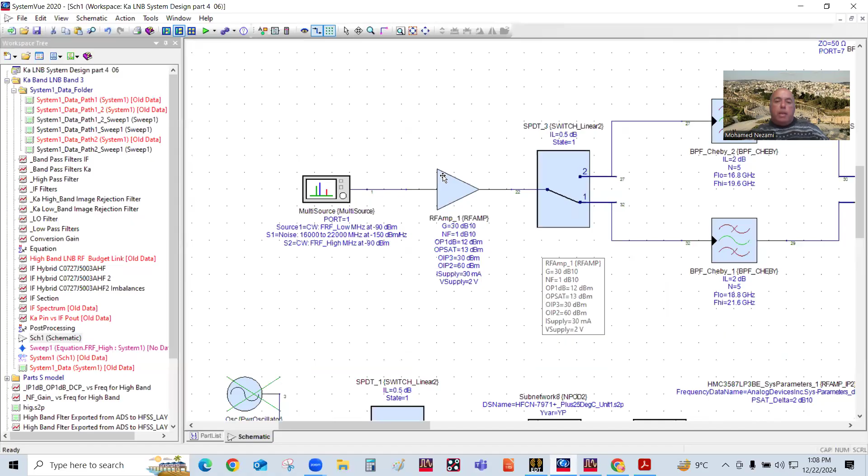If we can go back to here, we can go back to System View. This was designed with the LNA specified with these top level specifications, namely 30 dB gain, noise figure of sub 1 dB, and then you got the saturation level is 13 dBm.

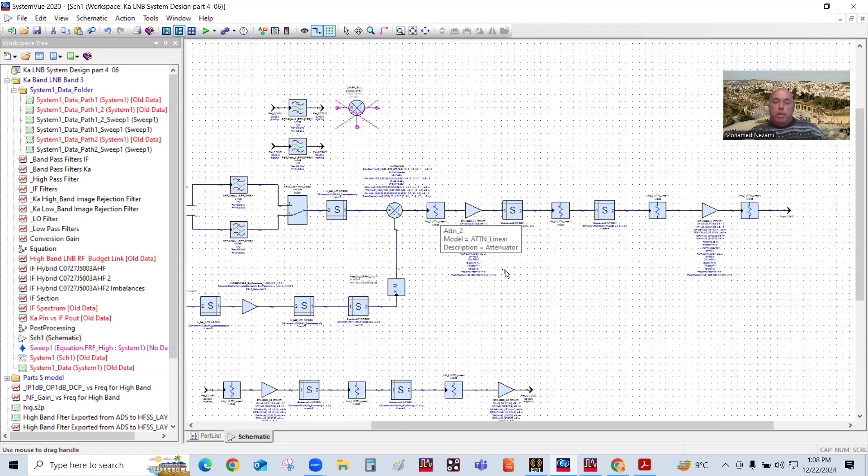Okay, so the LNB itself is a dual band. So we've got dual image rejection filter. We come in here, we switch between them, and two dual LOs. And then of course we have a common IF stage in here for both, and that's why we switch between two LNBs.

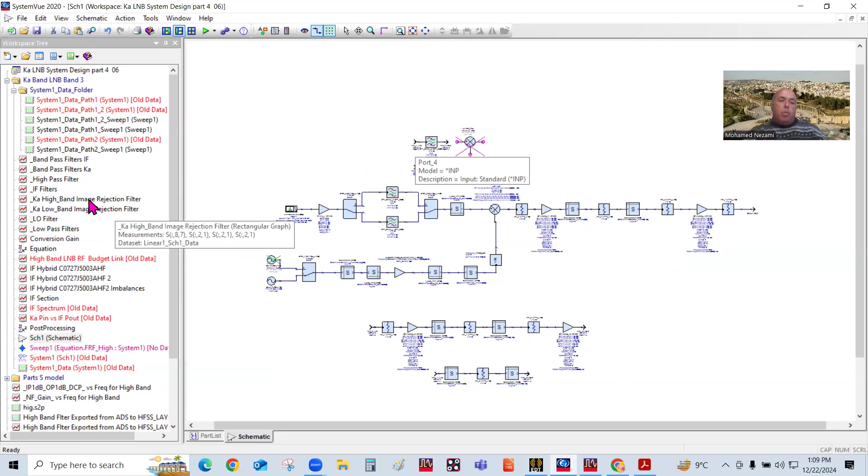Is because we want to maintain the same IF to shift back the IF into the same band. I have designed this, refer back to part one and two. That's where we analyze this, and you can go back and check all this stuff. So this was designed back then, and if you look at the budget link analysis in here.

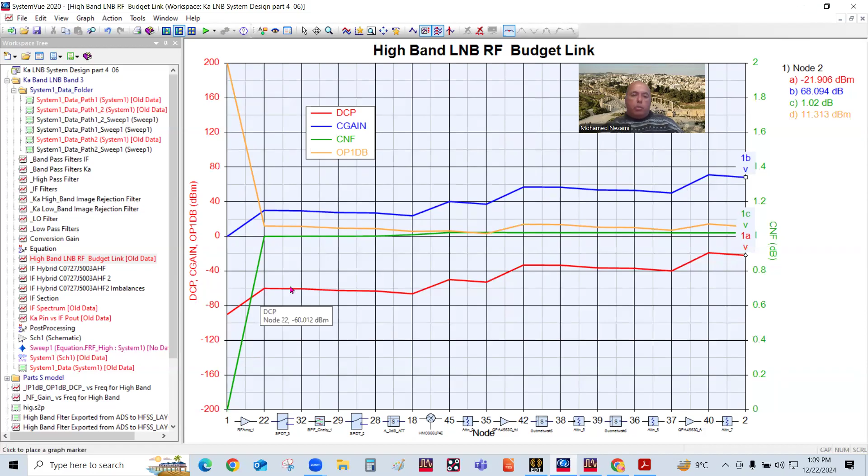So we've got these, let's see, this is the desired channel power, the cumulative gain, the cumulative noise figure, the output P1 dB compression point throughout the whole chain. And this right now is programmed for the high band, okay? And this is what we've got.

So we verified all the system level, and I have designed the filters last time, of course. Now recall that this is the frequency plan that we had. Basically, we had two bands from 17.2 to 21.2, and we chopped them into two bands, two LOs and two IFs, I mean common IF, sorry, for both of them.

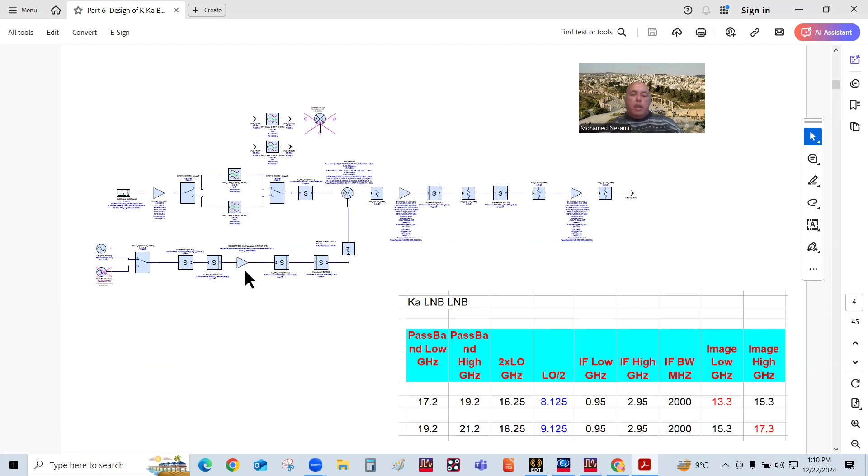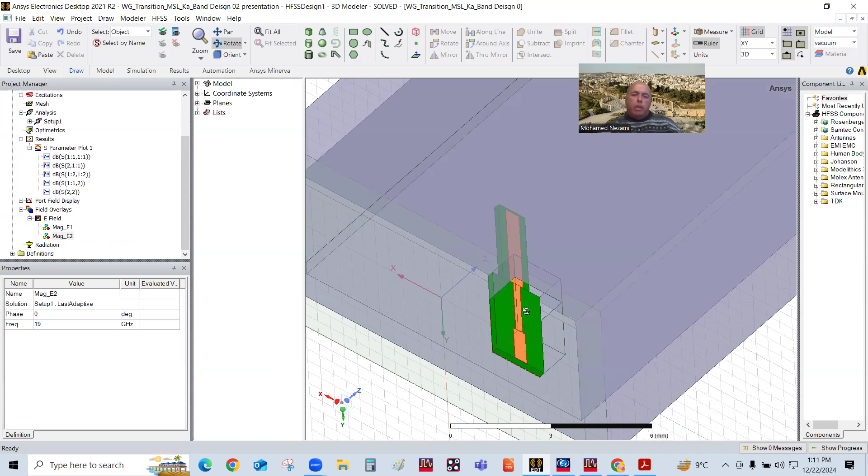And this is the design for the waveguide to PCB transition. As you can see, there's a probe that is going inside here. You can see that the substrate goes in, but it doesn't have a ground plane. And then I have a little section of a quarter wavelength in here that will match the impedance of this probe to a 50 ohm line on a substrate. That's Rogers 4003, 8 mils height.

Okay, so what we're going to do today, we're continuing this process. So this is what we still got to do: the low noise amplifier, finish that design, and finish the microstrip to waveguide.

All right, so LNA design, here we go. Top specifications, like I said from last time, this is what we use in the block diagram. So this is what we're going to do.

So we need 3 stages of this amplifier to be designed. We worked last time, and I got the small signal model in here, the S parameters CE3520K3. This is the device, and then I designed the system based on this.

I'm still waiting to get access to the nonlinear model, which will enable me to generate S parameters at various bias points other than the single bias point which NEC or CEL have given out here. That way I can predict what the saturation level and what the 1 dB compression point and third order intercept.

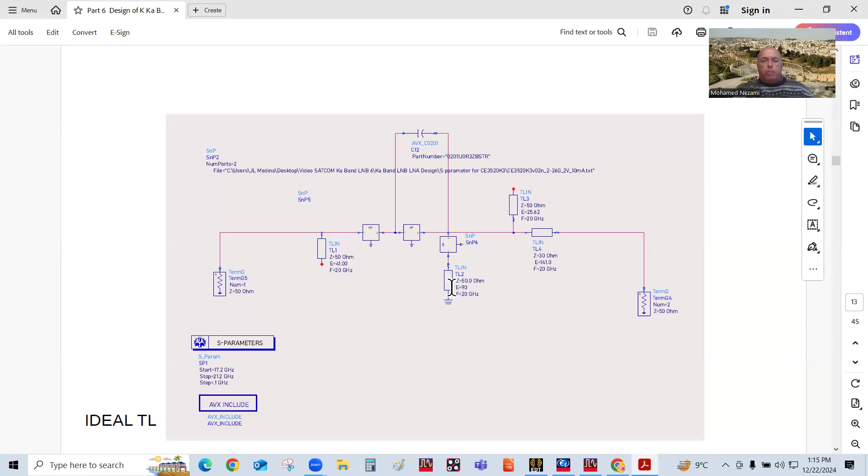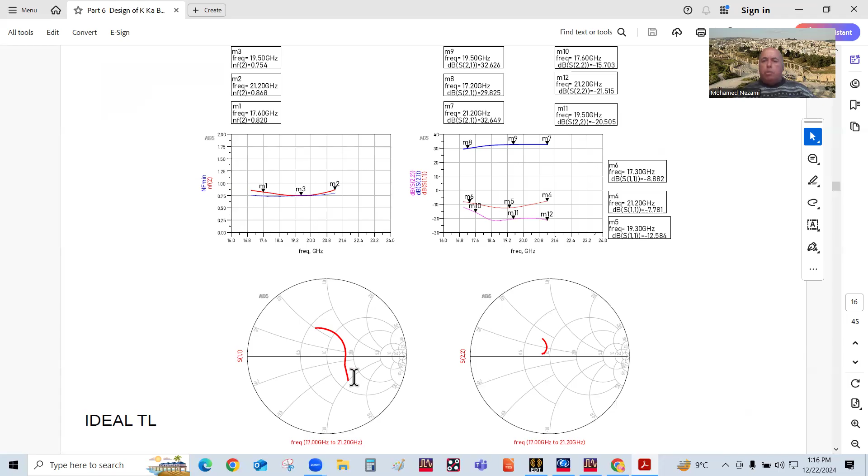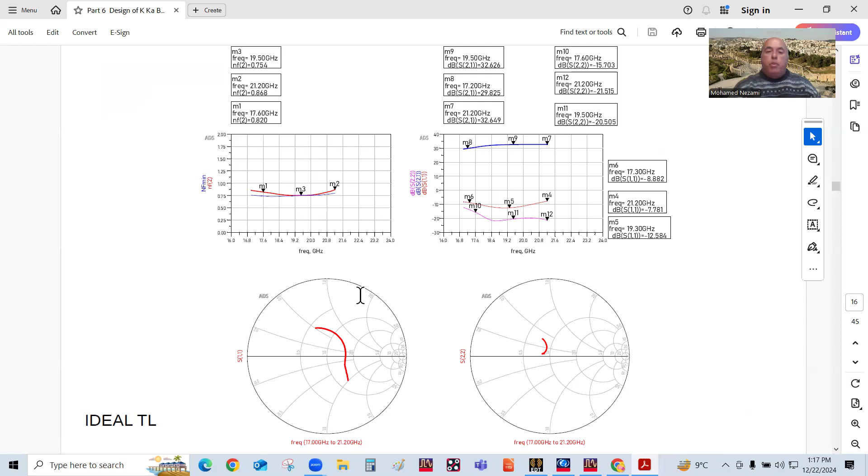And this is really normal, that's what you usually do. If you have a low noise amplifier, you can really never see a low noise amplifier that has return loss better than, I would say, sometimes 7 dB, 6 dB. That's because we really need to have a low noise figure, and as I showed last time, the optimal point on the Smith chart for gamma opt is a way further away, not the same location as the gamma of the device itself. So we need to match for not maximum power or maximum gain, but for noise figure.

And you can check back, please check back to the other one. Okay, so what we're going to do is take this circuit in here and then substitute transmission lines to these. So what we're going to do is, I go back to my ADS.

So we started out with this here. This is the transistor, and these are resistors, even though they're not plotted as resistors, but right now it's a two-port network. This resistor is from, whose resistor is this? Let's see.

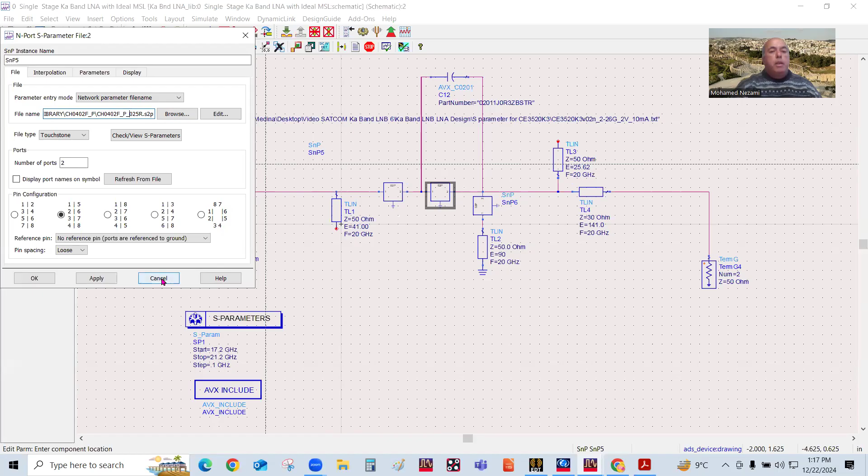That's a CH series resistor—I'll check it back in a minute—but this is a thin film resistor that is appropriate for Ka bands, okay?

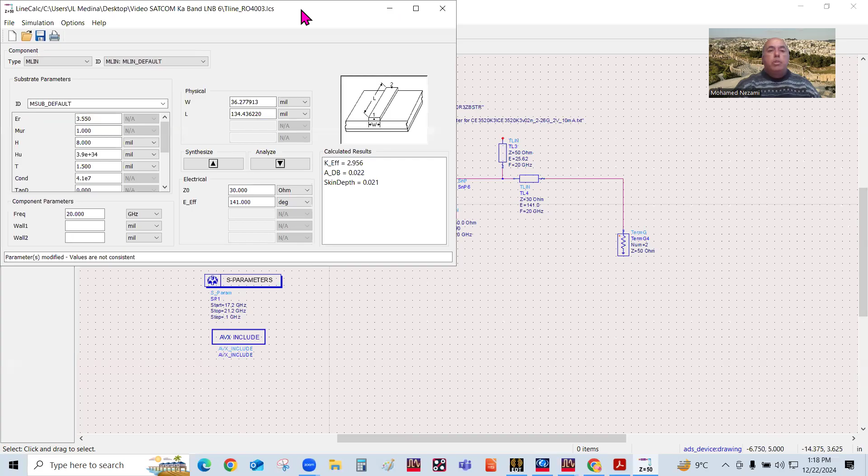So what we want to do is replace these lines with real transmission lines. The way we do that is we go to the tools and get the LineCalc, and then we just basically program it so we can do this. For instance, this line is 30 ohm, so we've got 30 ohm—it's already programmed for this. Then 141 degrees, and then we synthesize that.

So the substrate is RO 4003, 8 mil height. And when we run this, of course, it will solve and give you exactly the width of this line, which should be 36, and the length is 134. And you keep going through all of these.

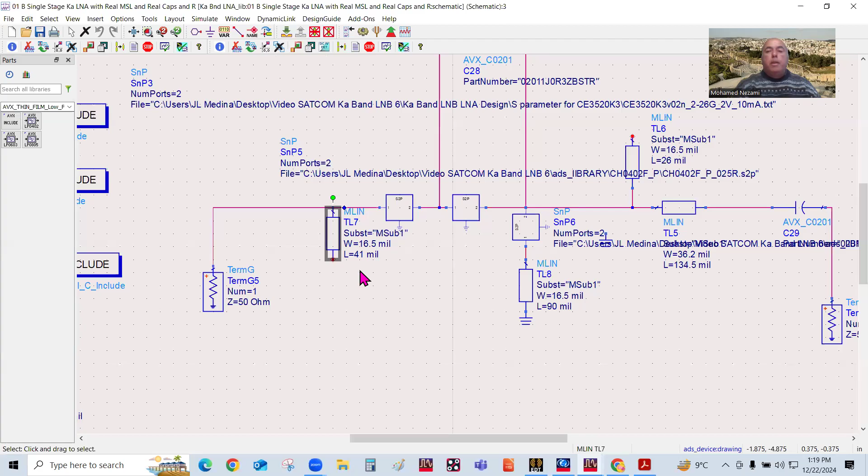So what we're going to do is close this and go to the actual layout. So this one—this is it here. If you open this, it's basically right here. You can see these lines have been replaced by microstrip lines, specified with a certain width and a certain length, and the substrate, which is M sub 1, specified in here.

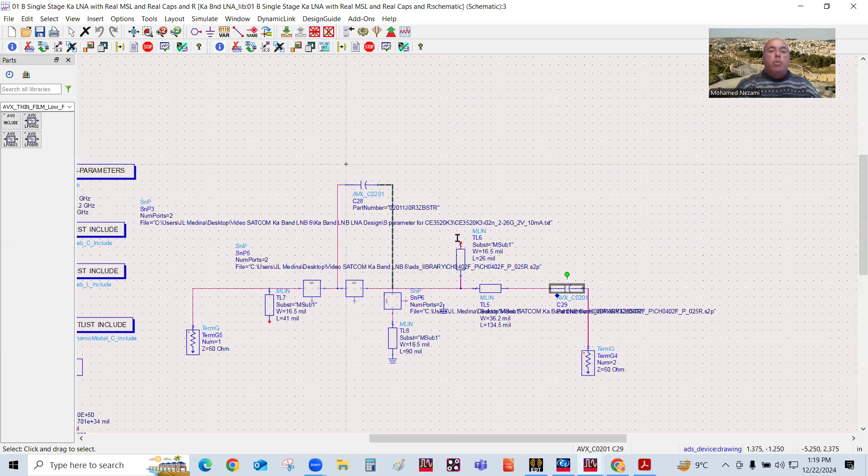So we do this for all of them. The cap components I already selected—this is AVX cap, high Q caps, and this is AVX cap. The resistors I've selected before, okay, and the quarter wave line in here was selected as well. So now what we do is run this, and we hope it will not deviate a whole lot from the actual ideal lines, okay?

All right, let me check what's going on here. Okay, so let's see it now. So we've got, like I said...

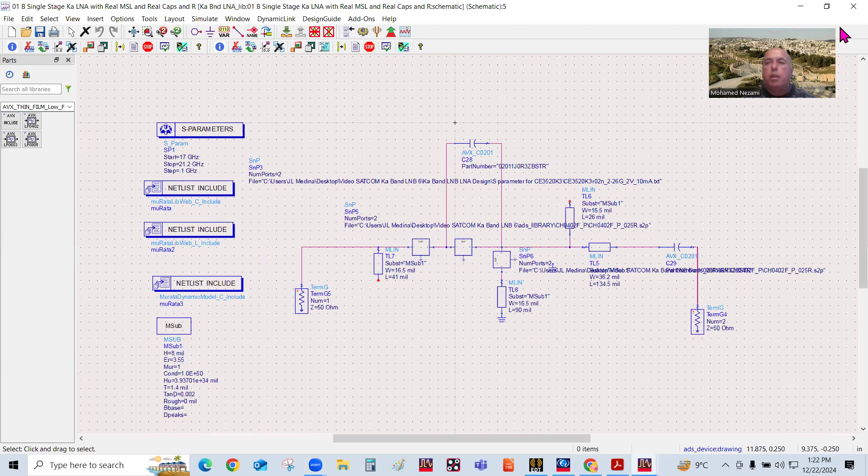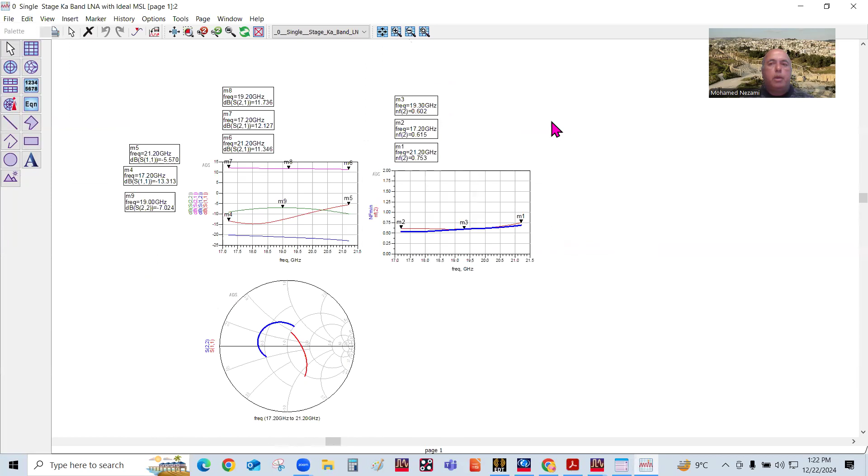We're at this—no, this is three stages. Let's see, this one in here is the LNA that we have designed, single stage, and we said that the response of this is really acceptable and nice and everything. So we're going to take this now and replace all of these lines with actual lines.

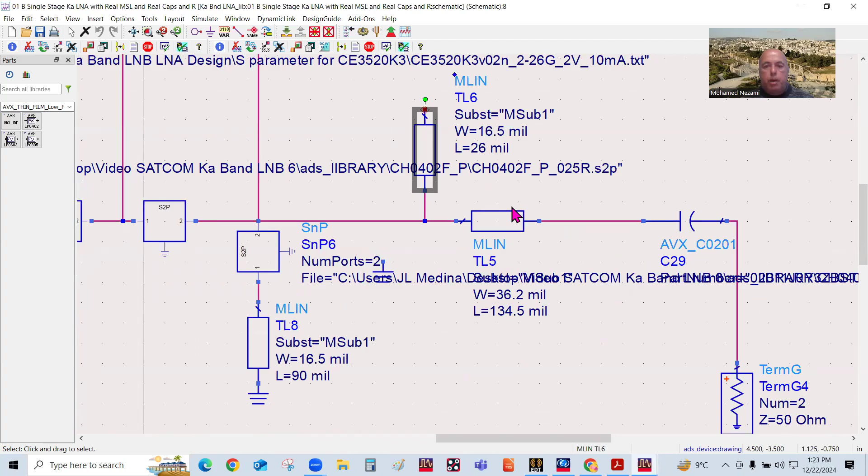And we have this cap already chosen from AVX. We also need to put a bypass cap, a DC decoupling cap, on the output. So let's see—now all the lines have been replaced by their equivalent from ideal to real lines, and the capacitors have added this cap in here. So now if we run this, ta-da, this is exactly what we got.

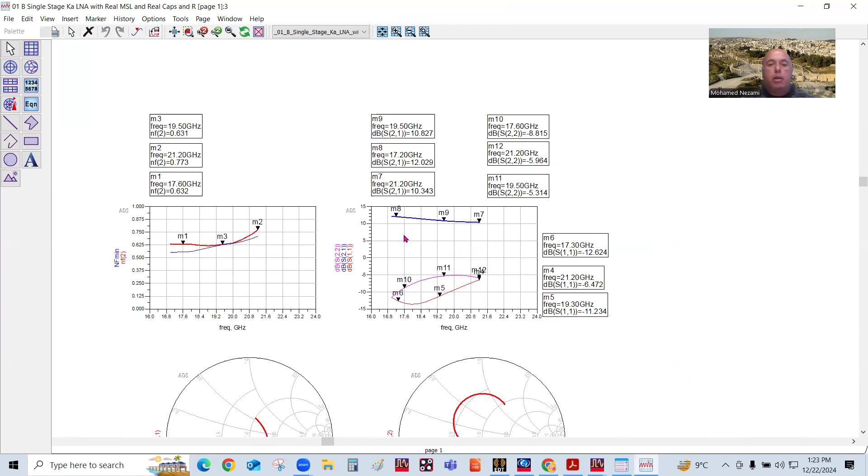So we're still good—we've got the noise figure at 0.6, 0.7. That's what we got, okay? And that was with the actual substrate lines, and the gain is anywhere between 10 to 12. So we got about 2 dB.

So what we're going to do next is use 3 stages of this and see what we get. So let's see, we're going to get 3 stages in here. What I did is take the same section and copy it 3 times, okay? And let's run this and see what we get—hopefully that's not going to be very far from the actual one with ideal lines.

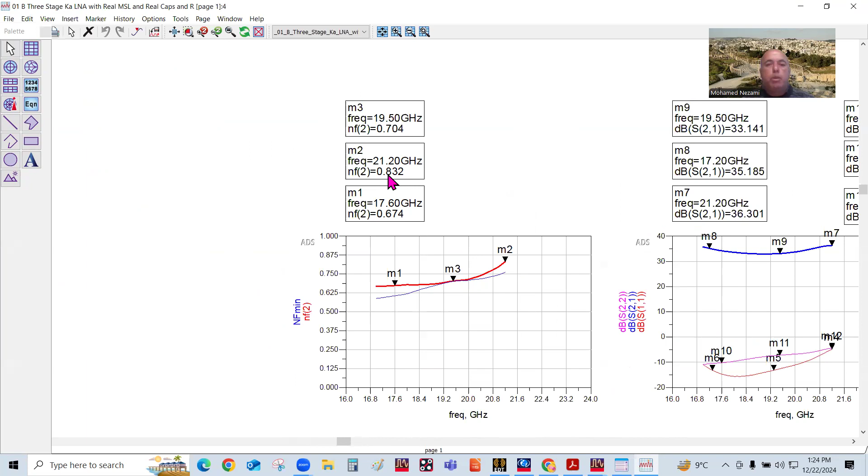And that's what we got. So the noise figure is still at most now increased by 1/10 of a dB, so 0.8 in here, okay. And the gain is 36, 35, 33 in here, so we have a slope that is sagging in here.

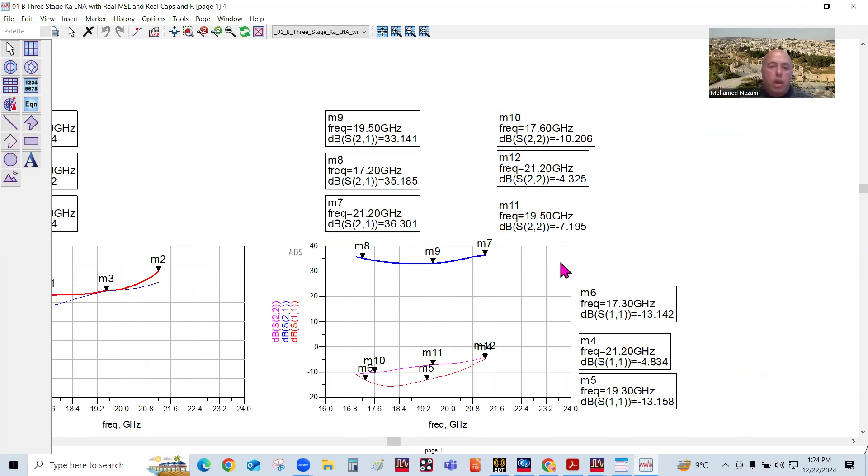And remember, this is still—I don't have any optimization on this, I have not run any optimizers. This is straightforward from last time. So what do we need next? Well, what we need next is—let's go back here. So we did this with actual lines, real lines, 3 stages with real transmission lines, and that's what we got. We ran that, and now we need to do biasing.

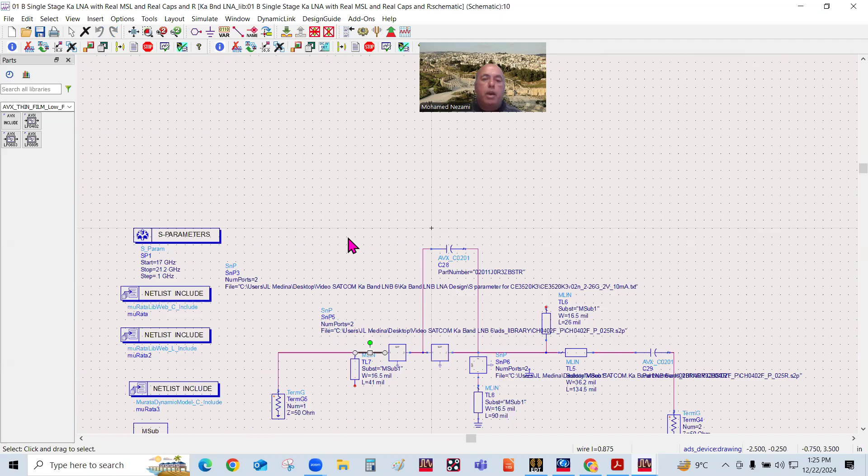We need to add the DC bias, because this topology in here is still missing the drain bias, which we have to add right here, and then the gate bias, which we have here. And like I mentioned in part 5, I can't afford having DC decoupling on the input.

The input to the waveguide is actually going to be a probe, an open circuit probe, which will have DC on it, so that I don't have to introduce components that would enhance or introduce more thermal noise than I would want, preserving the input here.

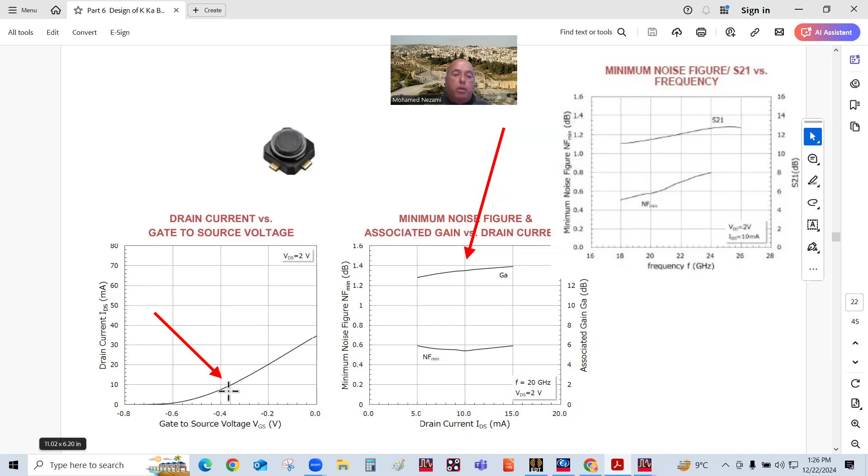We're going to add a drain bias and a gate bias. If you recall from last time, for the device we chose, the 3520 NEC, the bias point we want to run it at is 10 milliamps, the bottom of the ball right here. To get 10 milliamps, if you look at IDS versus drain source voltage and gate to source voltage, which is negative, you would need to introduce at the gate about -0.43 volts.

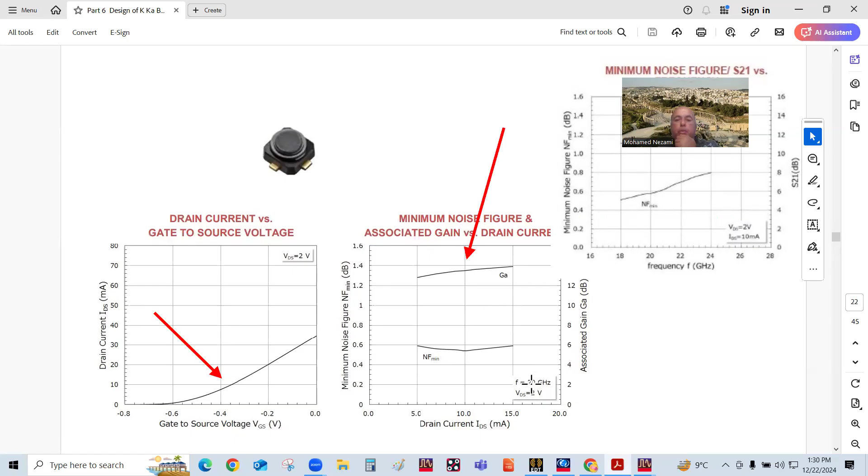We do the same thing on the drain, exactly the same, except here we don't have a voltage divider. In my case I may have one, because you need 2 volts for my case; we need to bias it at 2 volts. To do that from a 3-volt voltage regulator, you still need to split that voltage. So we're going to design a small section of DC bias at the drain and at the gate for this.

So this is the topology that we're going to follow, which is a standard. And here it is, okay?

So what I did here, the only difference is I didn't use a rectangular open stub. I used a radial stub, and you can check back on one of my videos where I introduced radial stubs. This whole video was talking about radial stubs on the drain or source. So you can check that out.

But essentially what I want here, I have used little 5 mil line sections and a 10 mil section, and this is a T junction, and then this is the quarter wavelength at 20 gigahertz. This is also in the middle, it's a quarter wavelength, and it will get less and less as we go on both sides. This is just to introduce a broadband open stub.

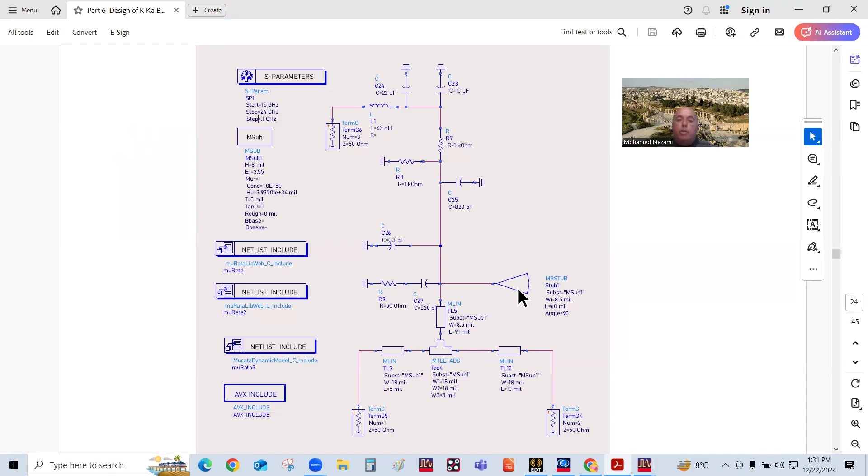So essentially, in theory, what will happen at 20 gigahertz, this point here, because it's an open stub, is going to look short. That short is going to short this quarter wavelength. And this quarter wavelength, of course, from the other side, will be open. The signal that comes from here goes out to here, and none of the signal will flow in here.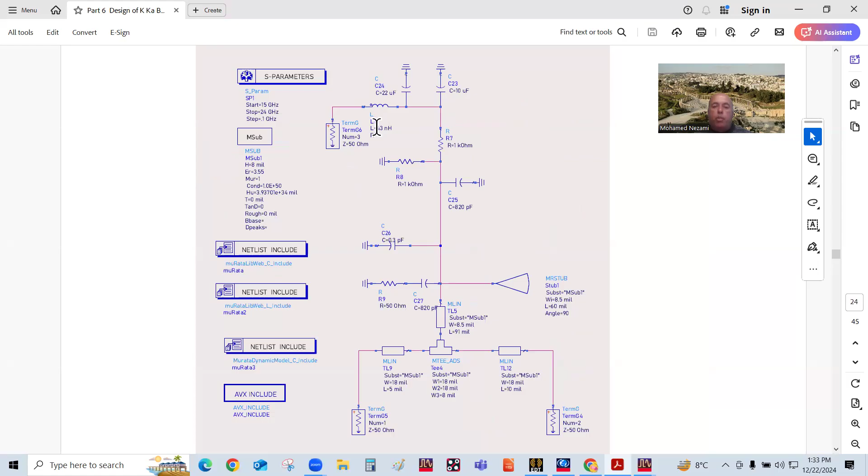When you run it now, theoretically it should give the same result as before, except here the Q is infinite for the ideal components. So what's going to happen is you're not going to get a sharp resonance like this, and that's precisely what happened. The resonance will also move because of the parasitic interaction with the actual components, shifting the resonance center frequency.

So you're going to have to do a little tuning. It's about 19.3 gigahertz right now. So in this case, what we have to do is increase the resonance, so we shorten the length of this and the length of that. I'm going to leave that for my optimization, which is going to come next. Okay, so let's get back here to ADS.

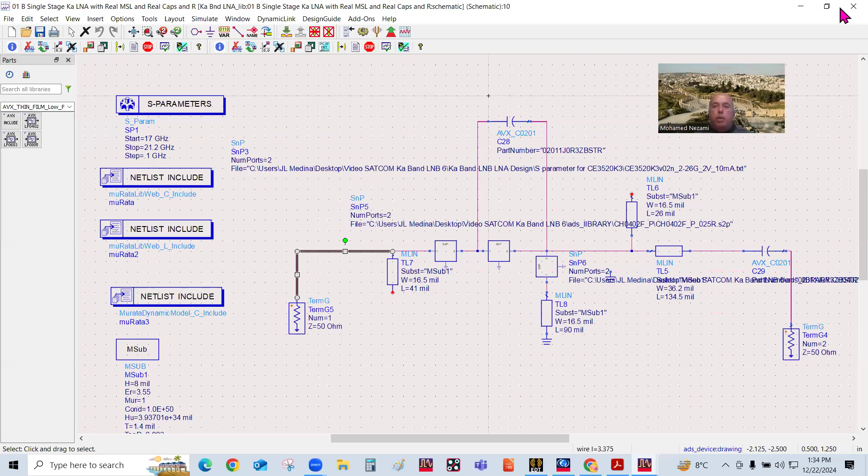So we're going to go in here and introduce the bias circuit. The bias circuit is right here - you can see there's the quarter wavelength radial stub and this one.

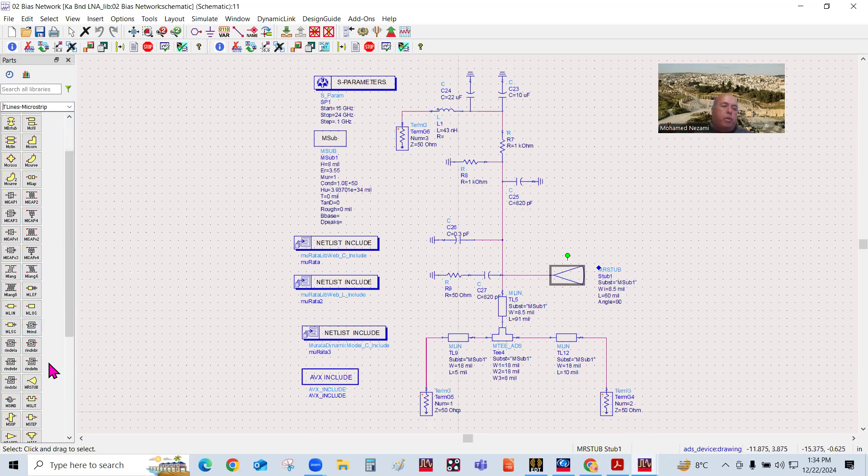Radial stub you basically get from the menu for microstrip lines - T lines, microstrip. Okay, and here it is. You can get it from here, right here. So you just go in here and pick one, and you specify the parameters.

So let's run this. And we run this, and that's what we're going to get. You can see that the resonance is basically at M9, 20.5 gigahertz.

So we need to shift it back a little bit. But anyway, right now this is from ideal components - these components are all ideal.

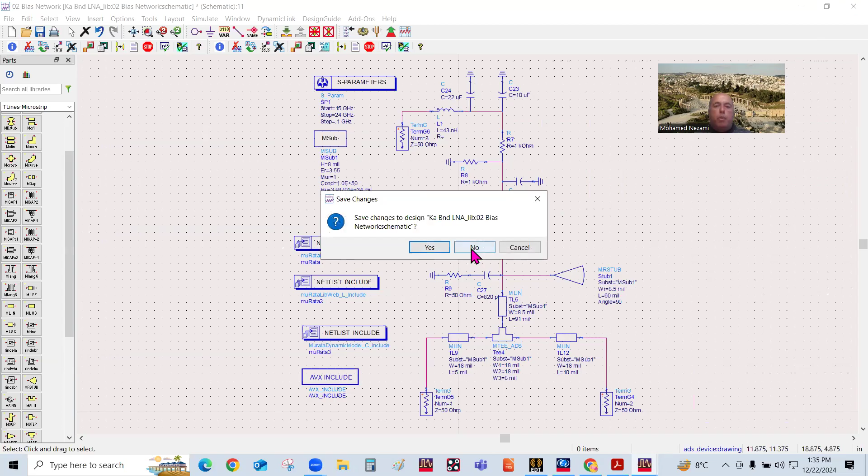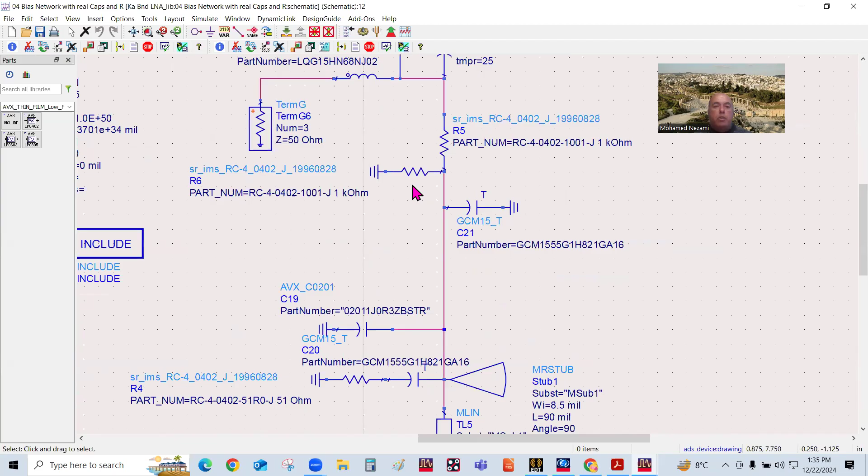So we're going to replace these components with actual model components that contain S-parameters based on measurements for the inductor. You can see this one here is from Murata, and all these parts are from various manufacturers. And of course the packages are all 0402 packages, really tiny.

Okay, so I'm going to run this, and of course you're going to get the same thing here. There it is, and if you look at the resonance frequency, it's 19.3.

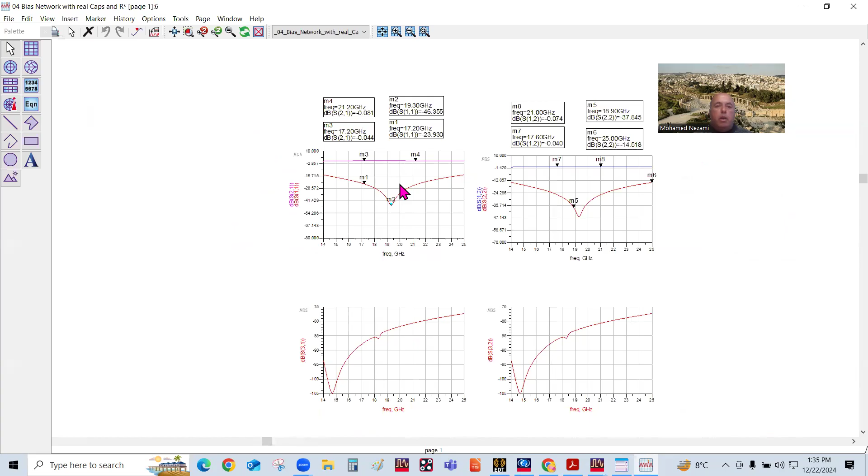So you need to increase it a little bit, but it's perfect - it doesn't have any significant loss. It's just basically 0.1 dB of insertion loss. Alright, so we got this going.

Now we have to go back to the amplifier and introduce it into the amplifier circuit. So this is it - we got the amplifier here. This is the same amplifier. There's a transistor device, there's the input matching, and there's the output matching to transmission lines. There's a stabilization circuit. Oh, what is this guy doing here?

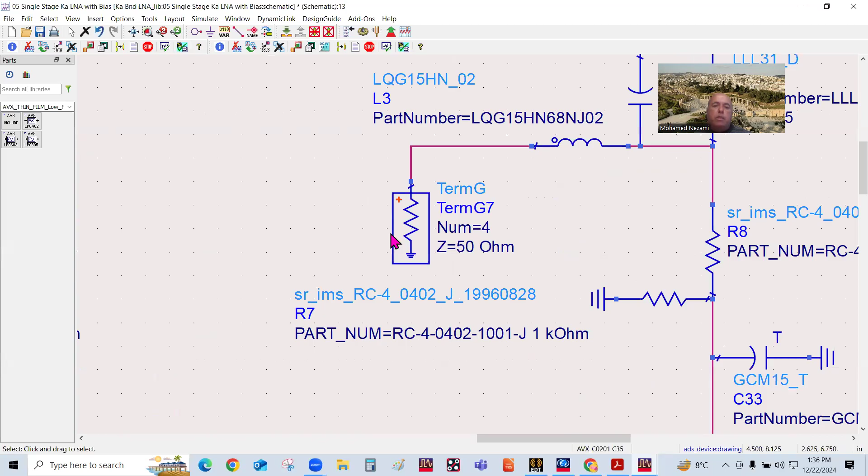Okay, and there's the stabilization parallel circuit in here with real components. So what we did, I added both the drain bias and the gate bias. And what I did instead of DC, I put an input, because sometimes what you want to do is sweep this input and this output, to see how much isolation you get between these.

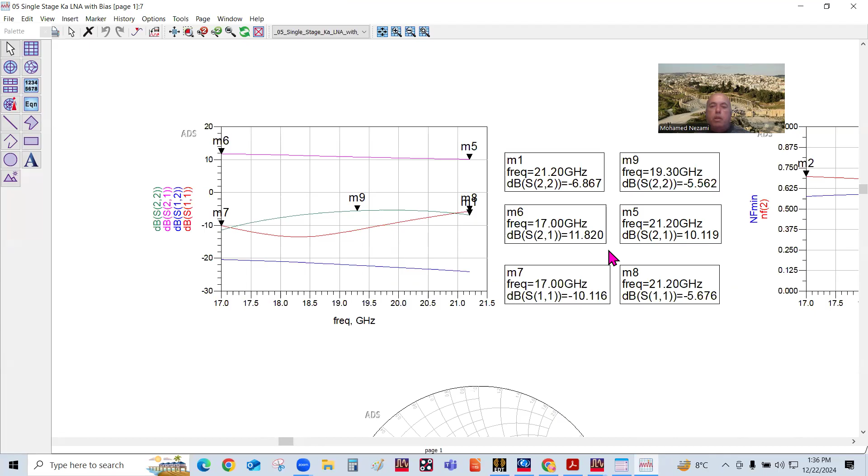Okay, so we're going to run this. And basically, this is what we got. So now the gain is still about 10 dB, 10, 11, 10 throughout the band. The return loss on the input output is still the same. It didn't vary a whole lot.

Of course, the significant thing is the noise figure - we want to see what happened, and it did change. Now we're up to 0.9 dB, so we're still not very far from 1 dB. And here's the input and output return loss for the whole amplifier.

Okay, so now let's leave this. And now I'm going to copy this circuit 3 times and see what the gain is. So we've got 3 sections in here. Here it is, I copied it this time. Here's one, another time, and here's another time. All of this is 3 stages.

Now remember, when I designed a single cell here, I designed for 50 ohms. So theoretically, all you have to do is just cut and paste forever. In my case, I needed just three stages.

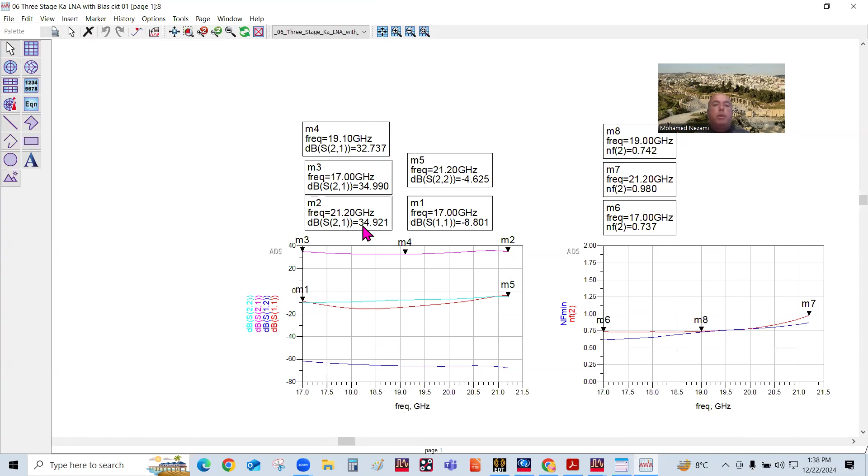And here's the final response without optimization, of course. So we've got the gain is 32, 33 almost in here, 34, 35 dB and 35 dB. So you can see the gain is very flat in here, okay?

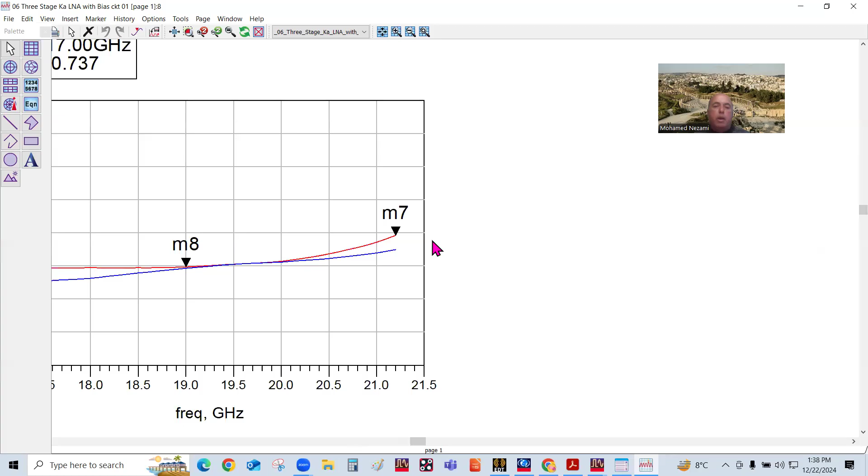And the return loss, you can see here, the worst one is now the output, of course it got degraded a little bit. Okay, so we need to have this below, say, about -8 dB. The noise figure, which is very critical, is still 0.98. We're just barely touching 1 dB in here at the higher frequency. And that's understandable because at higher frequency, you get more loss on the input side.

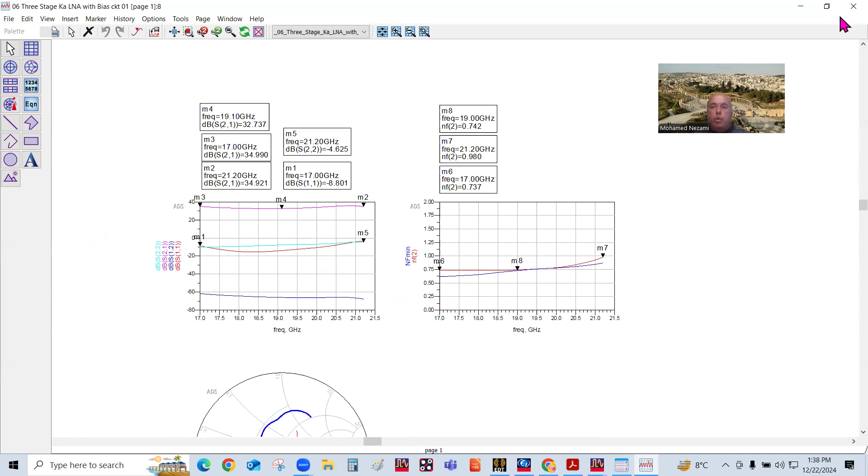So now what we want to do next, okay? Some people... so I have this 3-stage amplifier, okay, that is working fine and good. What I want to do now is prototype it.

So this is ready. Now all of these sections in here - so you can do PCB from ADS, but I don't want to do that because I want to build this in a totally different environment for schematics and PCB, which I use Cadence in this case, Allegro and schematic capture from Cadence. So what we want to do next, let's see, so we got this.

Okay, we got this, 3 times. Okay, where we are. Okay, so what I'm going to do next is, here's what I'm going to do. In my schematics, which I will draw totally in a separate software package, okay?

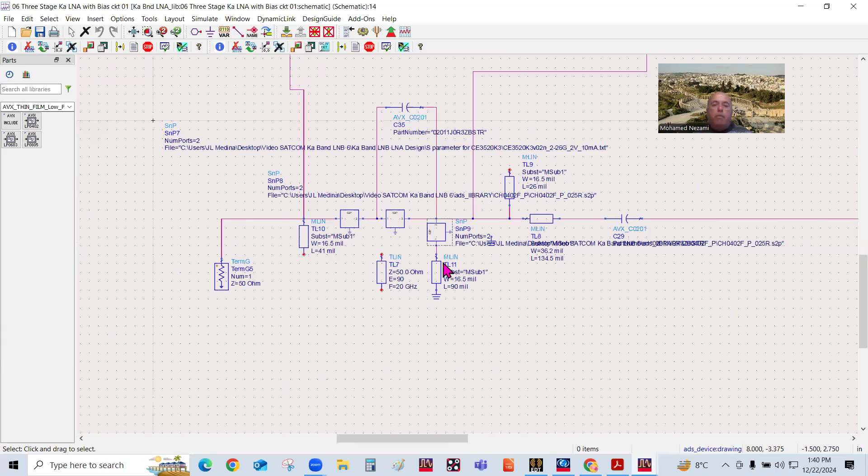Some people, what they do is they design this completely on PCB right here, and they just glue it into there. But I don't want to do that. I actually want - what I'm going to do is leave all of this stuff, all these passive components. I want to leave it.

But what I want to do is make a sub-circuit out of the output bias, everything that involves precise microstrip lines. I'm going to make a circuit out of this on the input and the output, which includes the drain bias with the output matching, and then the gate bias circuit with the gate input matching. And I'm going to basically create a footprint and export it and use it in my Allegro. And that's basically what we're going to do next.

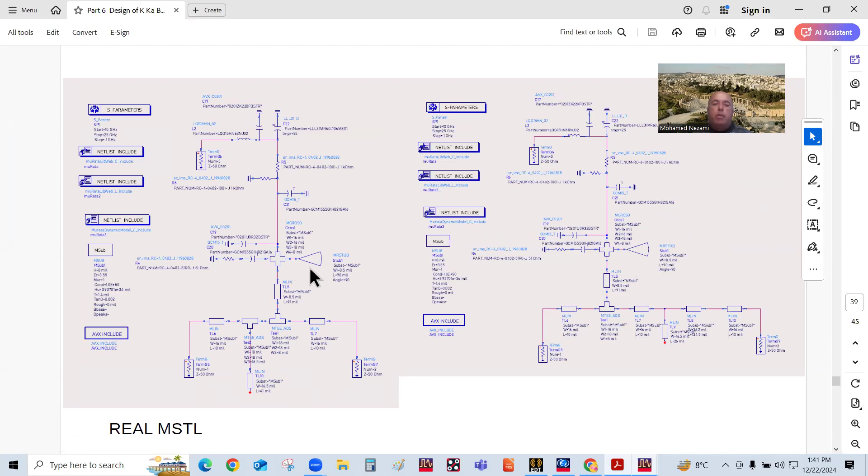So what happened is I got this. So what I did is I constructed the input and output sections, okay, right here. And what I'm going to do is create a footprint so that I could export just the transmission line stuff in here, okay? And so I did that, and basically this is what I got.

Now, unfortunately, I only realized this at this point that the output matching uses a low impedance line here, a 30 ohm impedance line, and that seems too wide, so I don't like that. So I'm going to go back and redo the matching section of the output later on.

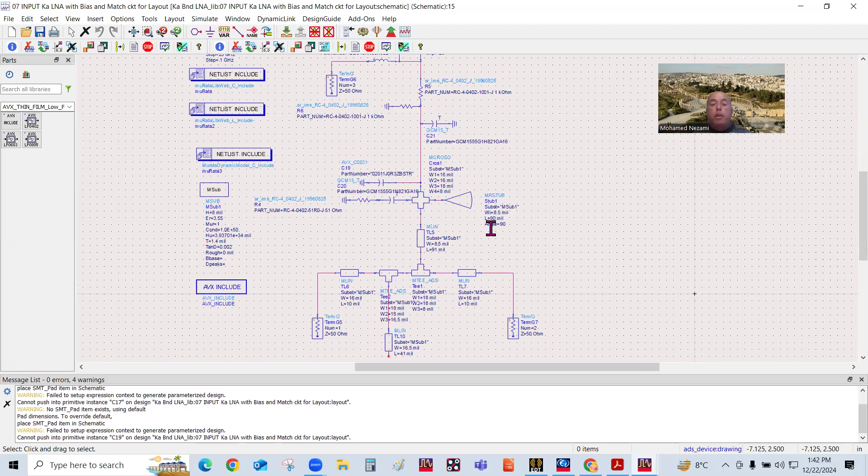But what you do is take this here and make it a 3-terminal device, sub-circuit, and basically export it from ADS, okay, as a Gerber file if you like - so here's the input on the side, okay. So if you do this - this is what I did - and I want to ignore all of these passives because I'm going to reconstruct this in schematics. And then what I'm going to do is only export the microstrip work.

Okay, so if you go to layout on this, create a layout. So this is basically my microstrip work. I want to take this here, and I'm going to take all of this. This piece here, I'm going to ignore all of the other passives, I don't care about it. So this piece here, I'm going to go ahead and export this, and let me see if this would work.

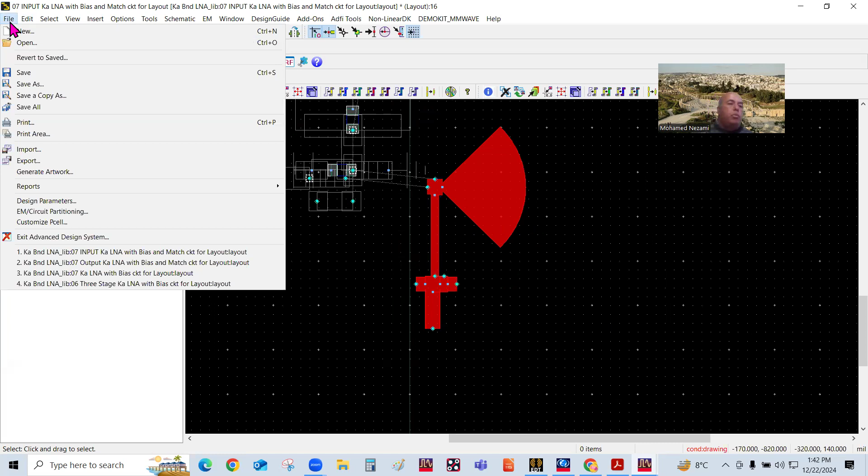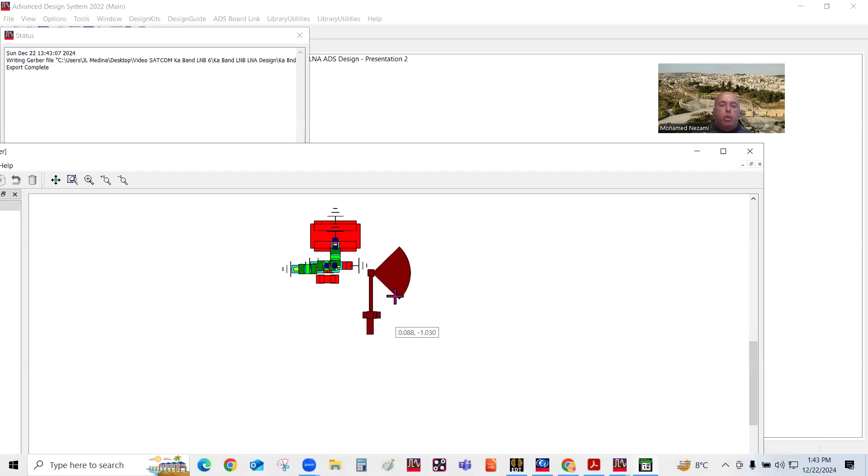I didn't try this, but we're going to export it as a Gerber, for instance, here, a Gerber drill. Okay, and I'm going to view it. Okay, here we go, so this is my Gerber of this. This stuff in here, this is the passives, I'm not going to worry about this. I'm going to go back and erase them, but this is what you would get, and that's what I'm going to take into my

the full schematics. And of course, we do the same thing to the output matching section. So that's what we got.

So this really puts now, okay, so somebody might come in and say, wait a minute, what about this amplifier in here, what about the verification of all of this stuff? This stuff in here, as you can see, the DC theory-wise, all of this stuff in here is short anyway. This point in here is short. So theoretically, it's not supposed to interact at all with your RF. So what you're doing when you export just portions of this just has to do with the drain bias microstrip line section and the output and input matching.

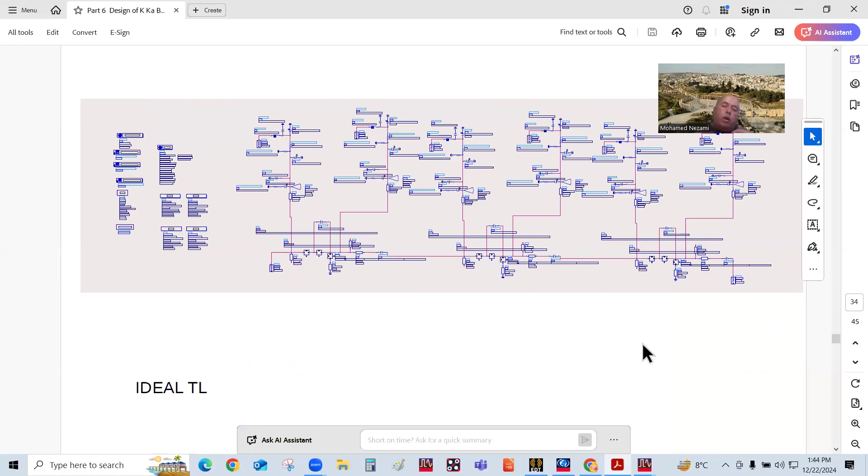That's totally perfect. So what I'm going to do is that, and then of course what I will do is we will revisit this when I do it in the Allegro layout. After layout, I'm going to export this back into ADS and do what we call, you can go to my videos in here that will show you how you do post layout performance verification. Okay, you can really check right here, which is what I did. What this will do, it will utilize basically the same thing.

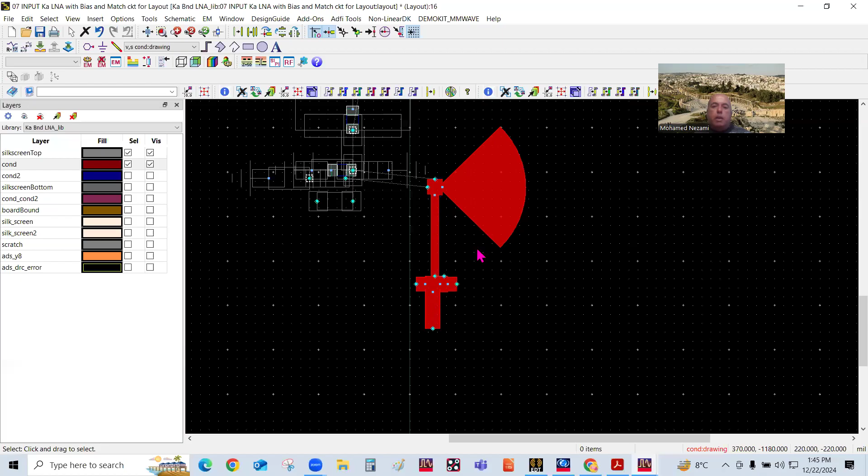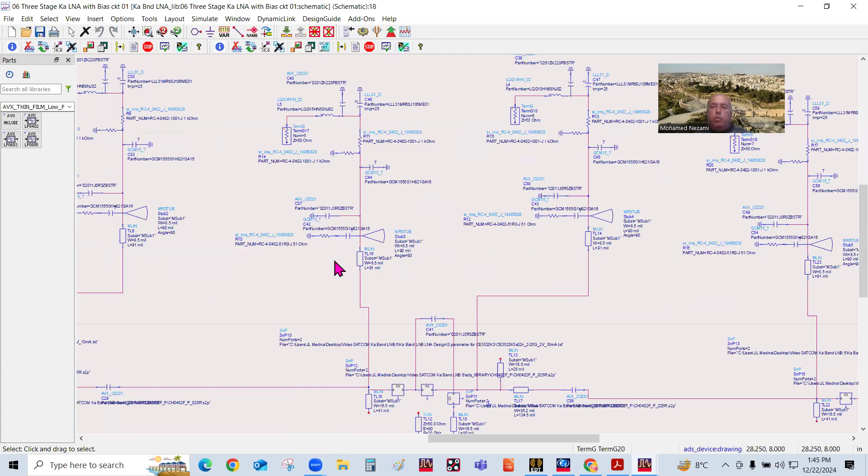We take this circuit in here, okay, the three stages, let's go back to it. So we take this here, and what will happen is this, all of this will be an artwork, copper work with input and output ports. And we're going to bring back this copper that's going to be laid out here, and then bring in these components, the equivalent of these components, and the transistor itself, okay. And then we're going to run it by simulating combined S parameter and EM finite element method as computed, and it will give us what we call post layout verification, okay.

All right, so we're done really with the low noise amplifier. So what's next? Well, let's go back to the rectangular waveguide to

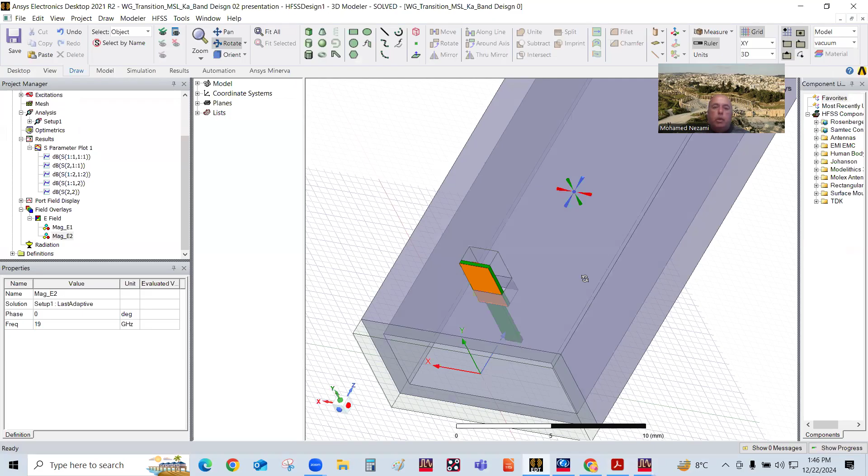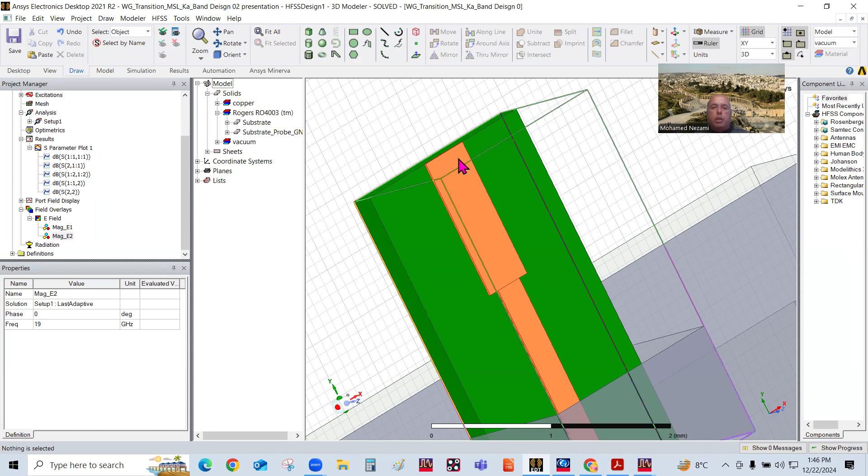microstrip line. So what we have in here, this is the same substrate, it's a Rogers material substrate. Let's go back to, I just pull this up here. Okay, so we're going to go back to, as you can see, Rogers 4003. And this substrate in here, the design of this, also I covered this in my other videos. There are some other videos that I did cover the rectangular waveguide to microstrip line transitions. You can refer back to these.

And so what I did is I designed this right now, and so what we're going to do is we're going to take the S parameters output of this. The frequency response of this is this, basically. So we've got this is the through transmission, and this is the reflection for the lowest waveguide mode, TE10. And this is for the second mode, TE20. And let me see, make it 5 so that you can see it here. Okay, so that's this guy in here.

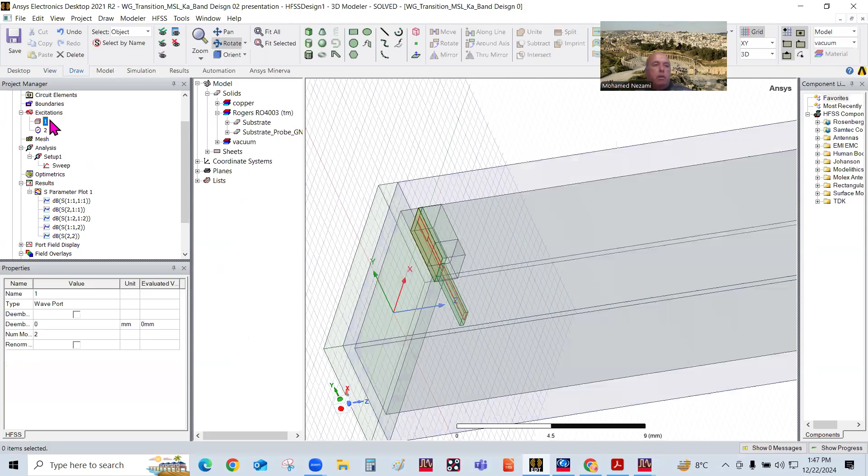Okay, so what I did in here is I specified for the excitation on the input that I need 2 modes for this. Okay, and that's what happened. So I excited 2 modes in here and ran this, and this was designed.

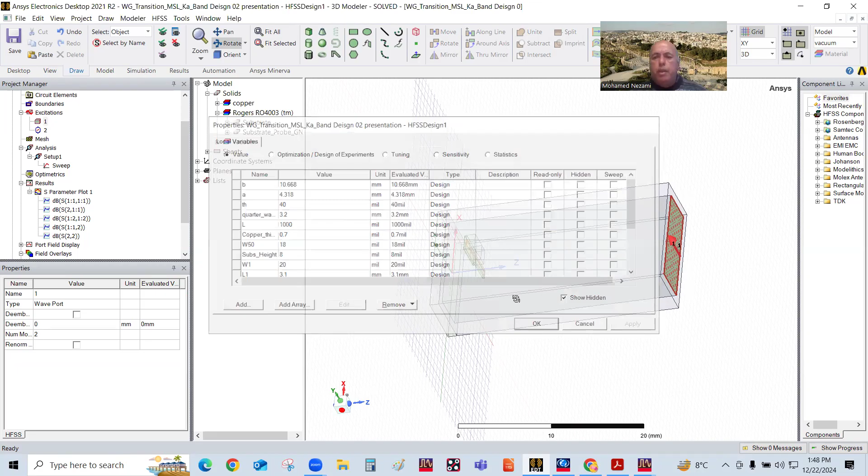So this is a rectangular waveguide. The rectangular waveguide is a standard waveguide for Ka band. So if you look at the dimensions of this, which is 10.668 millimeter by 4.318 millimeter, which is the WR, what is it, 25 or 75? I forgot, but so that's what you get. And what will happen is the LNB will be an extension of this here, basically.

So what I did is I came in here, let me explain it a little better. I want it on the side, front. Okay, so what I did right now is this port.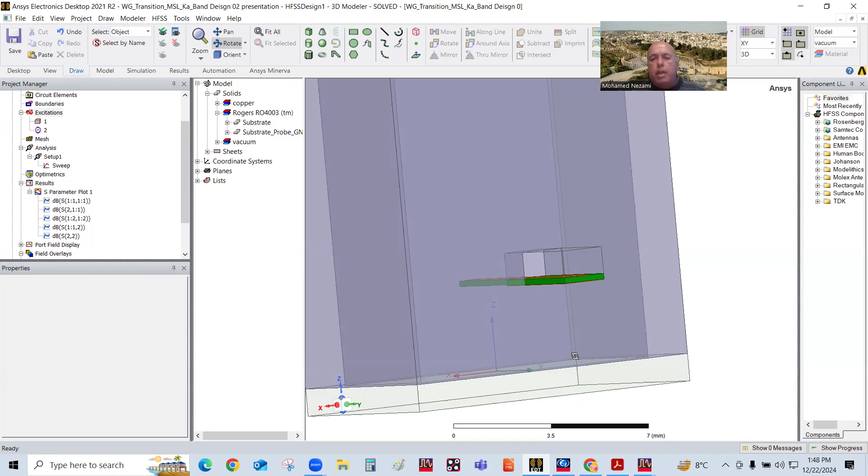This board extends through a little cut in the waveguide at a distance from the short end, which is a quarter wavelength at 20 gigahertz. So this distance here is a quarter wavelength at 20 gigahertz, and what I have is a probe sitting right here into the waveguide.

You can see on this side. Let's go to the top and just show you. Okay, so this is the probe, it's going in here.

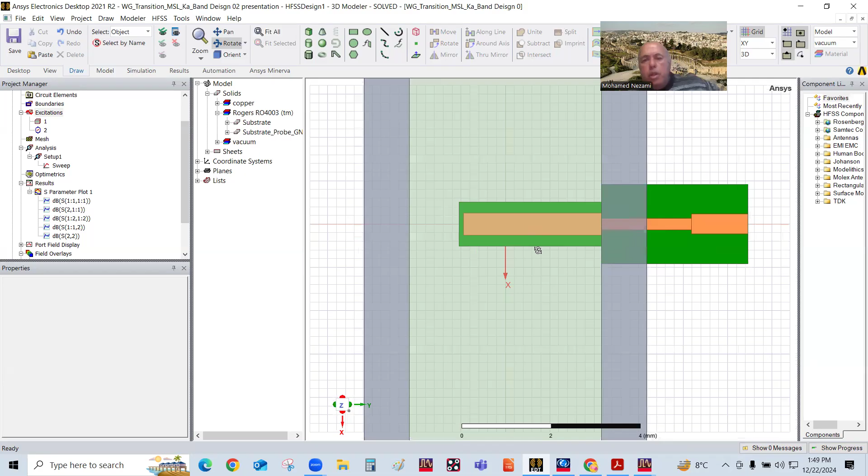Then I have this 50 ohm line here, this is a 16 mil wide line, and between the probe and the 50 ohm line there is a quarter wavelength transformer, which basically transforms the probe impedance to the 50 ohm impedance.

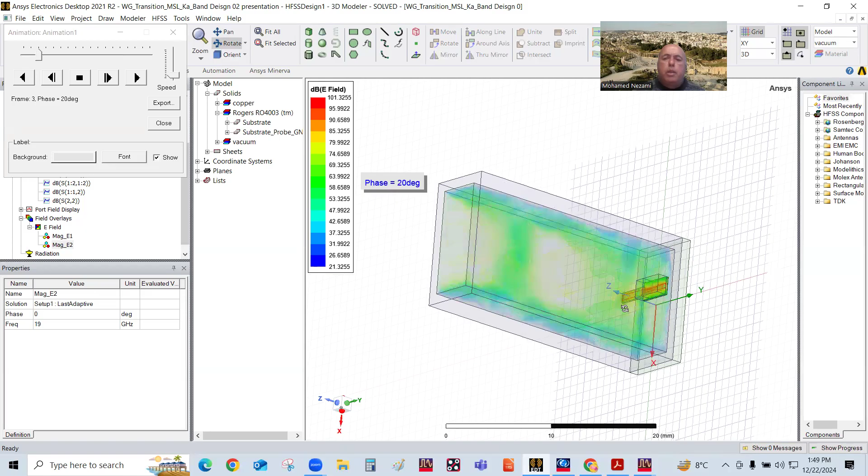Let's animate this here. How does this work at 20 gigahertz? Basically, the wave propagates from here, goes in, and then it will go back.

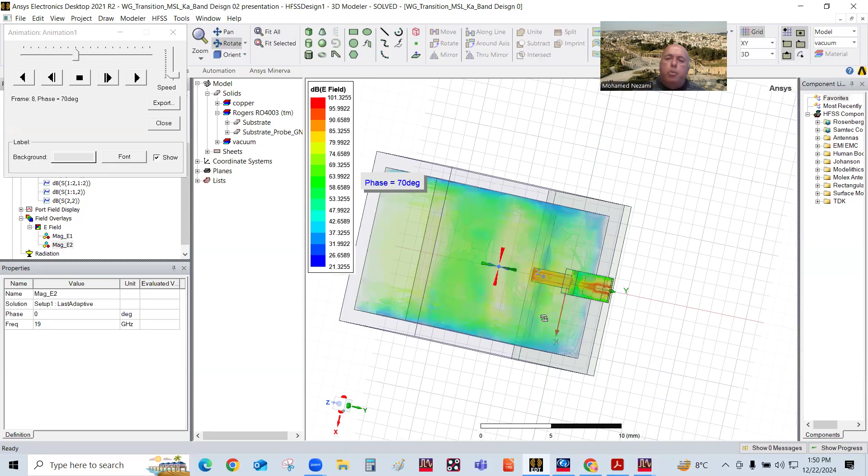Any signal that goes to this side will be reflected back and totally picked up by the probe. The probe then basically takes us from TE mode to TEM mode using the microstrip section here.

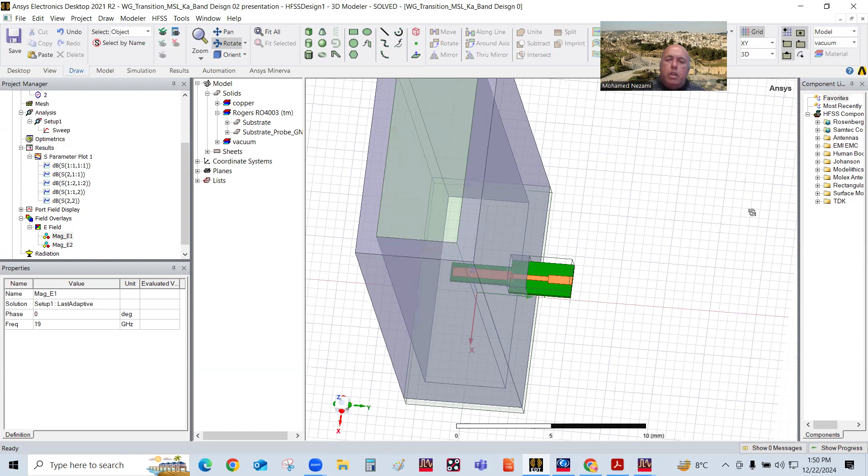My LNB is going to be fed. Let me stop this. So what I'm going to do is this board is going to be extended like this, and my LNB will be right here, basically. Now, that's what we get.

So what do we do now? As a final way of verifying the overall system, I'm going to come in here where I used to inject the signal into the LNB.

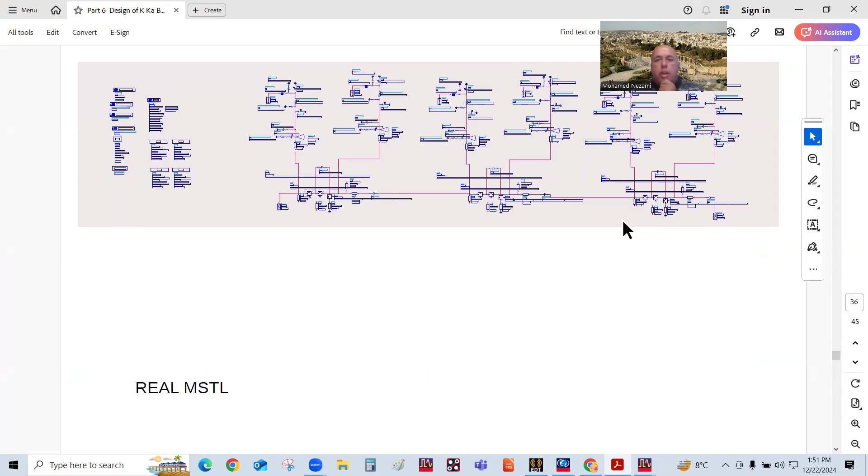I'm going to replace this with real parameters from this amplifier, this 3-stage LNA. So I'm going to bring in the S parameters and the linear model of this and put it right here.

And I'm going to add another block here for the transition, which is this one. So I'm going to bring this in, and the performance, as you can see, the loss is barely 0.2 dB. Let's see what it is in the middle.

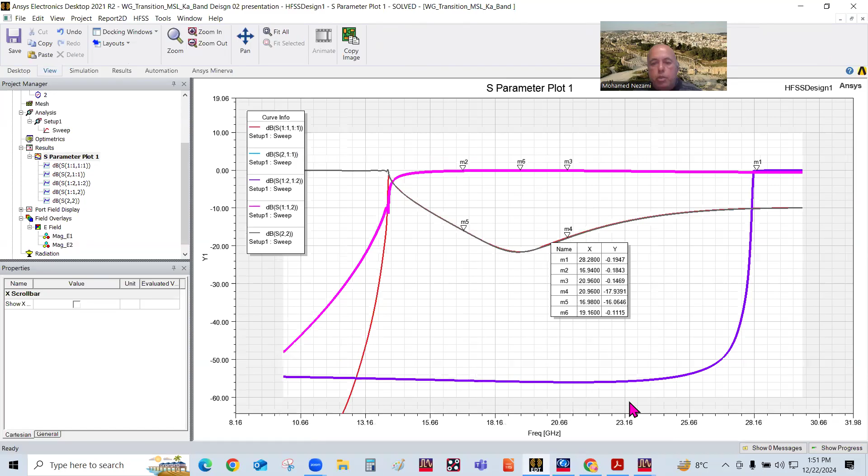So here's one, M6 is 0.11. Okay, but we're going to have more than this because of the surface roughness for the copper.

So what I'm going to do is put the actual S parameters from HFSS in here, export them to here, and then see what happened to this.

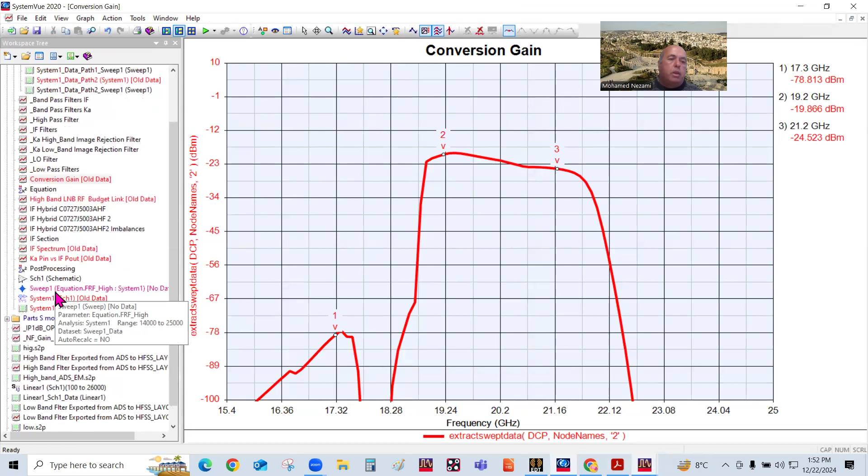So we're going to go and look at the conversion gain. We're also going to go back and look at the noise figure and gain plot, basically for the sweep of the input and output.

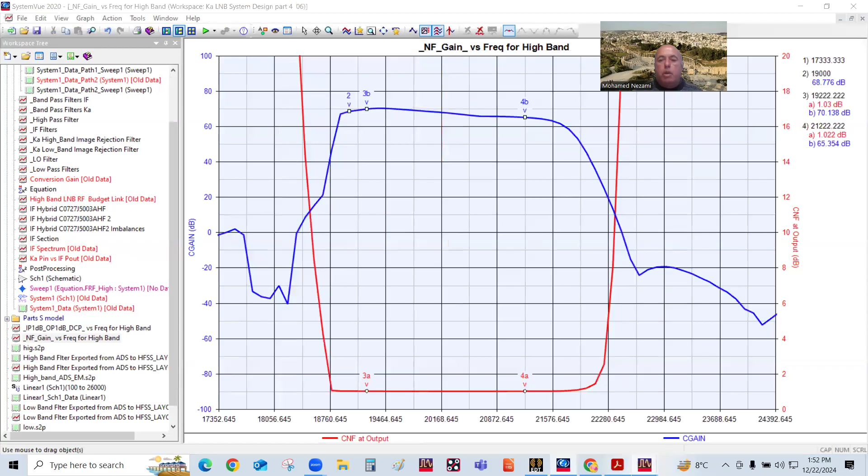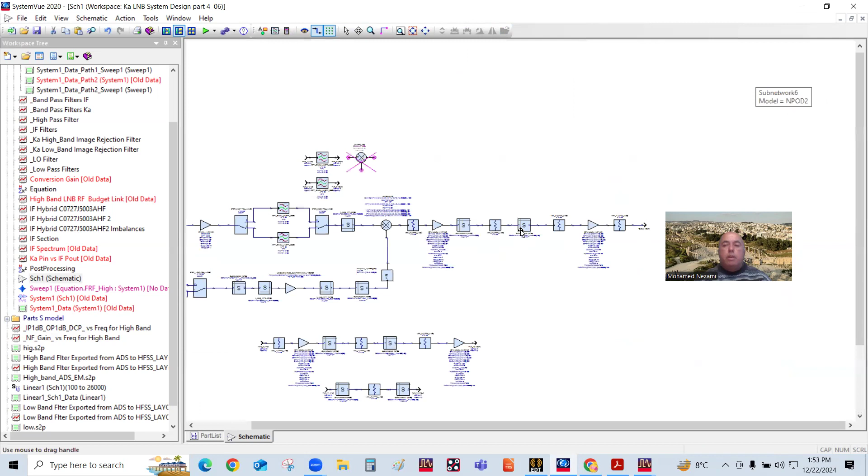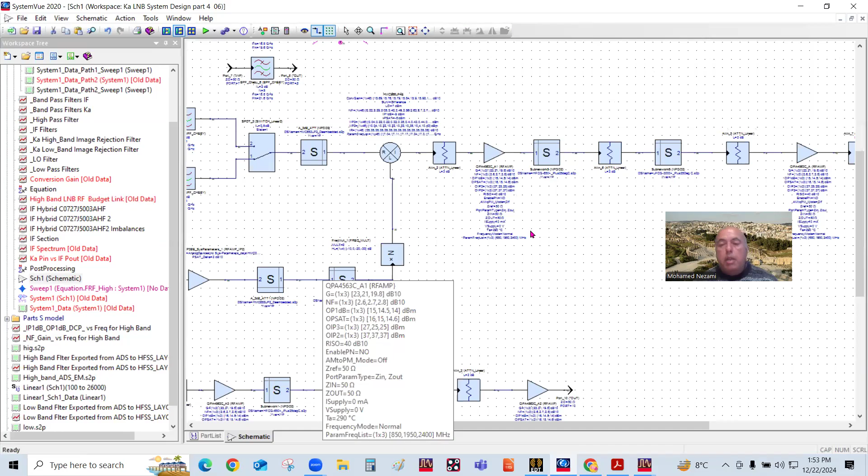So ladies and gentlemen, this is it for this session, part 6 of the Ka band LNB. I'll look forward to seeing you in the next section, where we'll finally bring in the S parameters, exported from HFSS, ANSYS HFSS, and ADS into the SystemVue, to see how the overall system behaves. And then we still have the IF section, which has to be designed. The IF section was designed and simulated separately here, and we need to see how that behaves. The components are already selected, but we need to model it into ADS if we can, to include all the nonlinearities and parasitics to verify for that.